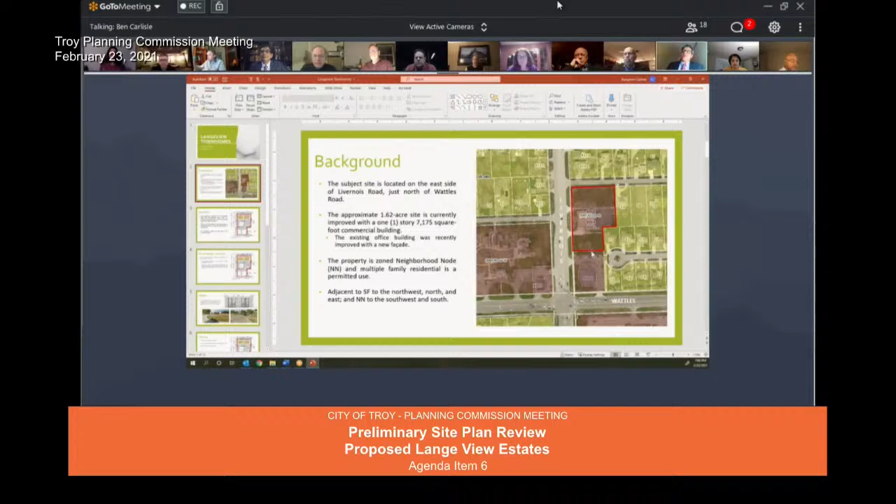Tonight before you is a proposed condominium or townhouse project. As the Chairman noted, the subject site is located on Livernois, just north of Wattles. The subject site is outlined here in the red outline. It includes 3 parcels and a total of approximately 1.6 acres. You'll note there is an existing 1-story, approximately 7,000 square foot office building on the site, which was recently improved with a new facade as part of it, through the building permit process. The property is a neighborhood node, and multifamily as proposed is a permitted use in this district. You'll note the site is surrounded by single family to the northwest, north, and east, and to the southwest and south is neighborhood node zoning at the intersection of Livernois and Wattles.

Proposed site plan is shown here in front of you. Again, just to outline, this is the existing office building currently on site that has been improved. The applicant is proposing to construct 8 townhomes that would front on Leetonia. Access to the site would be off 2 points of access off Livernois here. We should note that there is a 3rd parcel as part of the site, but it's not at this point proposed for any future development.

All access to the site will be off the 2 existing curb cuts that already exist on Livernois.

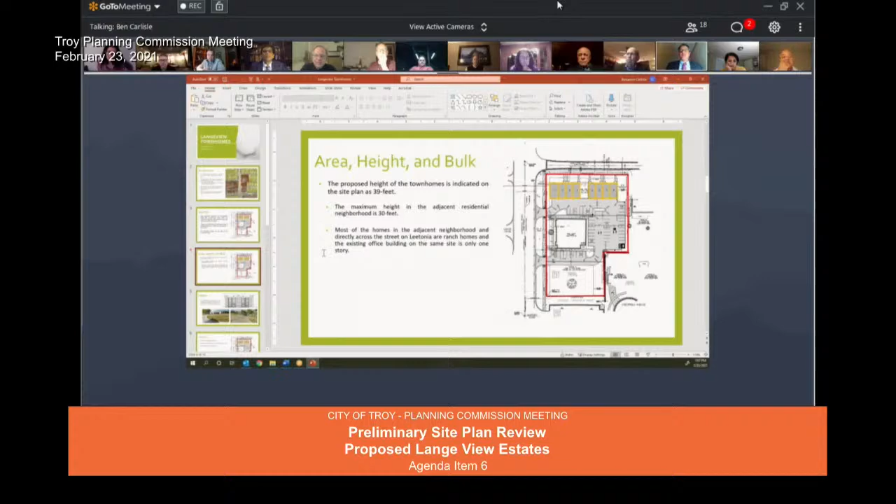With regards to area, height, and bulk, we note that by the dimensional standards, the application meets the zoning ordinance requirements. However, there is a provision in the zoning ordinance regarding transition.

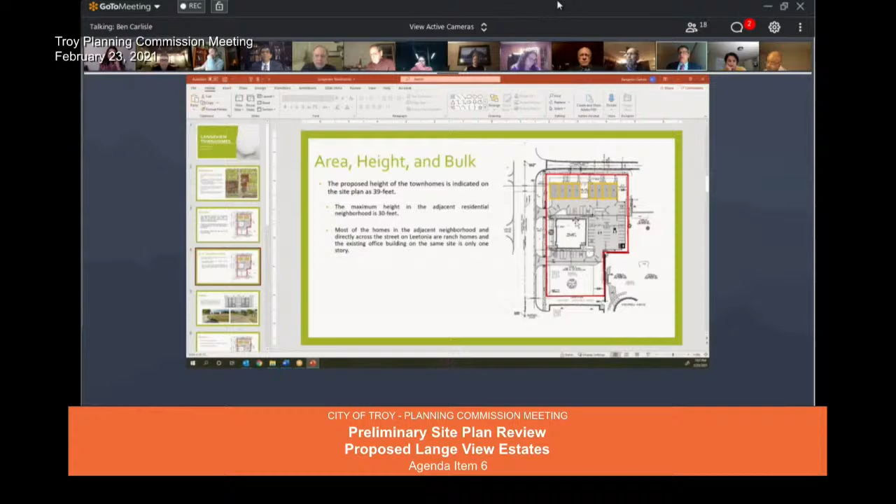One of those is in relationship to height. The proposed townhomes in the site plan are 39 feet, while the maximum height of the adjacent residential to both the north and east is only 30 feet. In fact, most of those homes in the adjacent neighborhood are single family, 1-story ranches. We also note that the existing building on site is a 1-story office building.

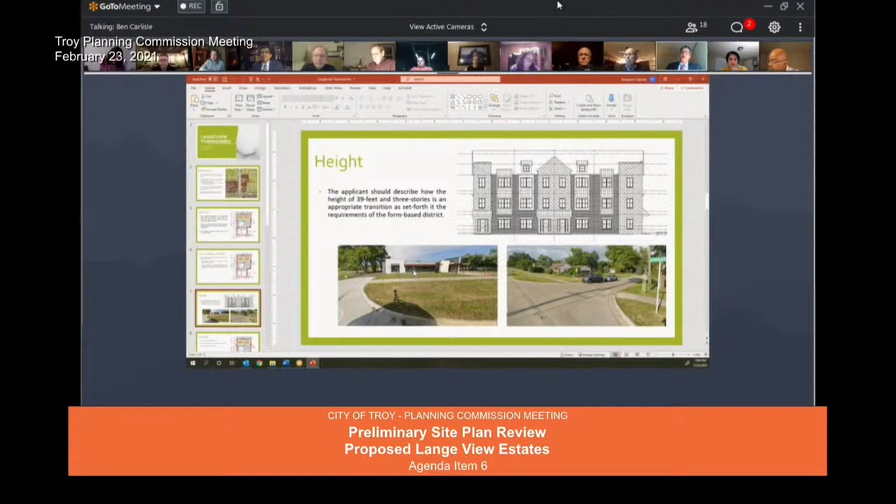So we are asking the Planning Commission to consider if a 39 feet high, 3-story building, 2 buildings essentially, on site really is an appropriate and comparable transition between the existing 1-story office building on site and the surrounding 1-story residential properties to the north and to the east.

With regards to parking, this was reviewed by both myself and the engineering department. We both know the office building itself is deficient in the number of handicap spaces, and many of the spaces on site serving the office building are short in terms of the required length of a parking space.

So they're going to have to expand or extend existing parking spaces. And lastly, the applicant needs to provide bicycle parking, because it's not provided on the site.

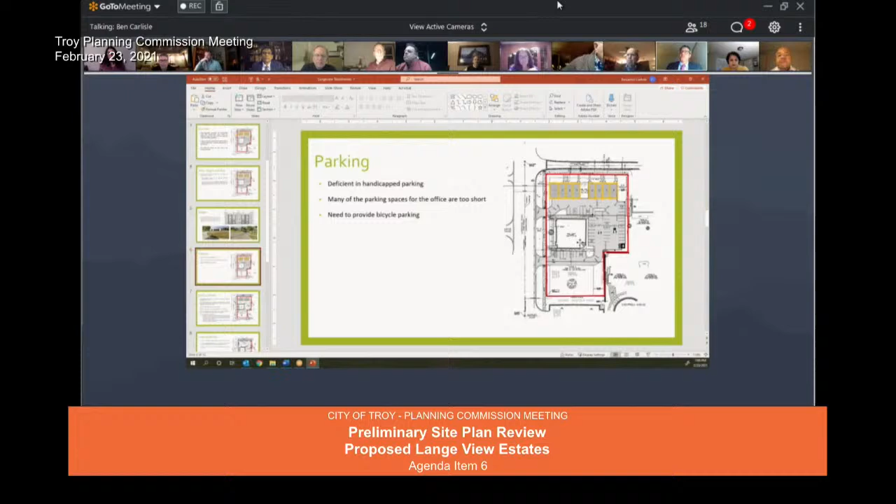The site was reviewed by the engineering and fire departments with regards to circulation. The fire department has expressed concern about fire apparatus moving around the rear parking lot, specifically in this corner location, and they don't feel they can meet the required turning radius. So they're asking the applicant to reconfigure the spaces or curbs in order to properly get a fire apparatus around the site.

With regards to the driveway, the engineering department noted that it needs to be 30 feet wide at the throat, and currently it's too narrow at that point. Also, the parking drive aisles must be 24 feet in width, and most of them are only 22 feet, so they're too narrow based on engineering standards.

The engineering department notes that though Livernois is a county road, they believe they will require a right turn deceleration taper somewhere in this general location as part of the site plan, and they're asking that the applicant consult with the road commission regarding that requirement.

The engineering department also reviewed the circulation and concludes that the rear parking area, specifically in this general area, is poorly configured and rather awkward. So in conjunction with the fire department, they're asking for some reconfiguration of the curbs to allow for better and smoother circulation in this particular area.

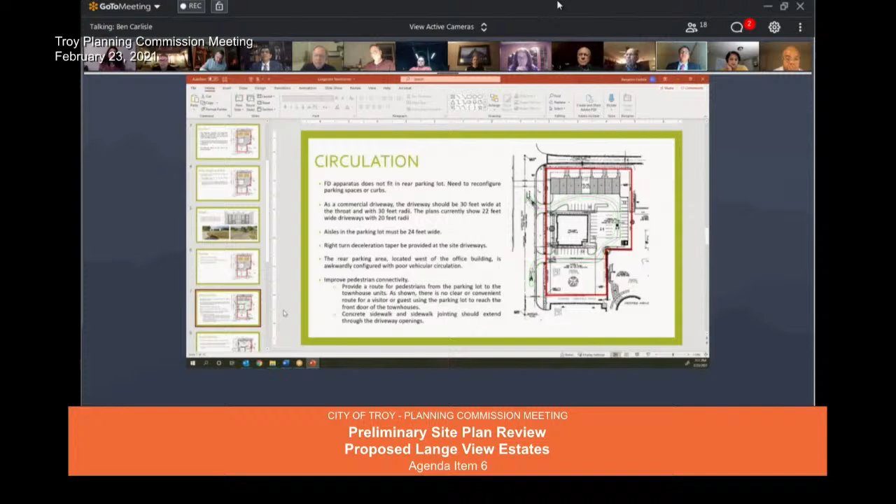This line of 13 parking spaces is required to be broken up with one landscape island with a tree inside of it. And lastly, the applicant indicated trash enclosures, but the details were not provided in the plan, so it's unclear how they propose to screen the trash enclosure.

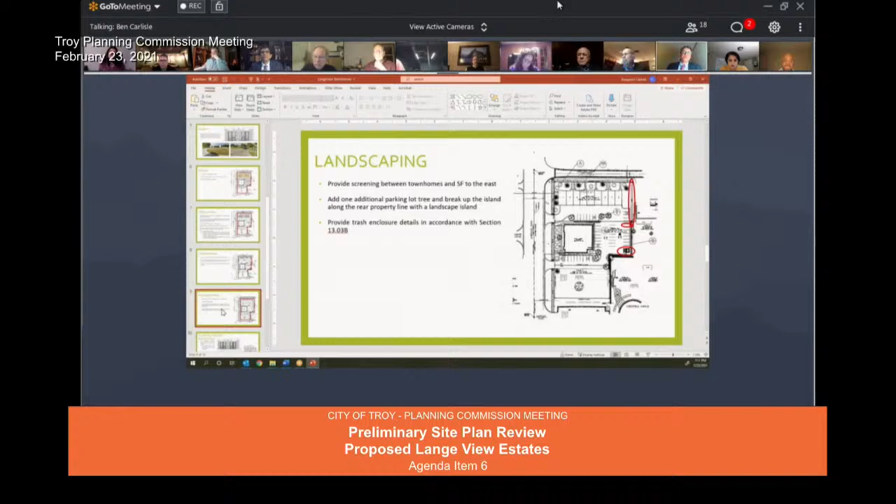The applicant did provide a photometric plan. A total of 4 pole-mounted fixtures are proposed. The applicant did not indicate any building lighting, and specifically we would like an indication of what the building lighting is on the front as it relates to Leetonia, with regards to how it may impact those properties on Leetonia. The applicant also did not provide cut sheets of the proposed fixtures.

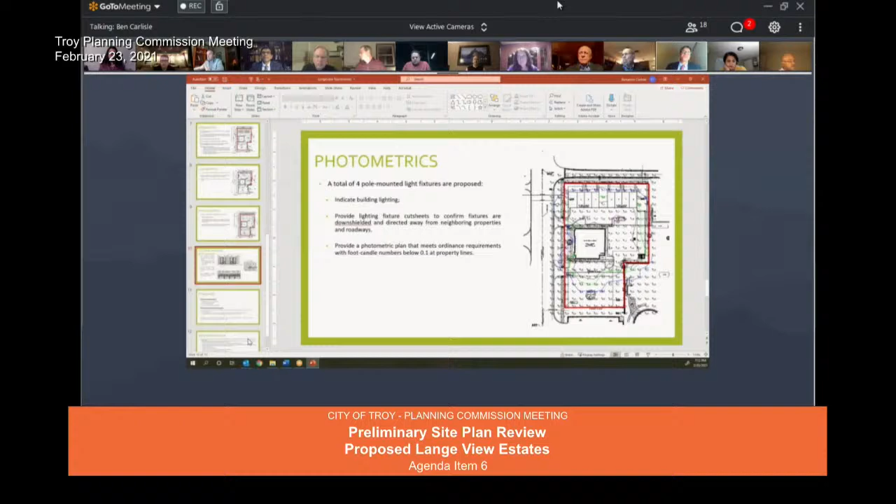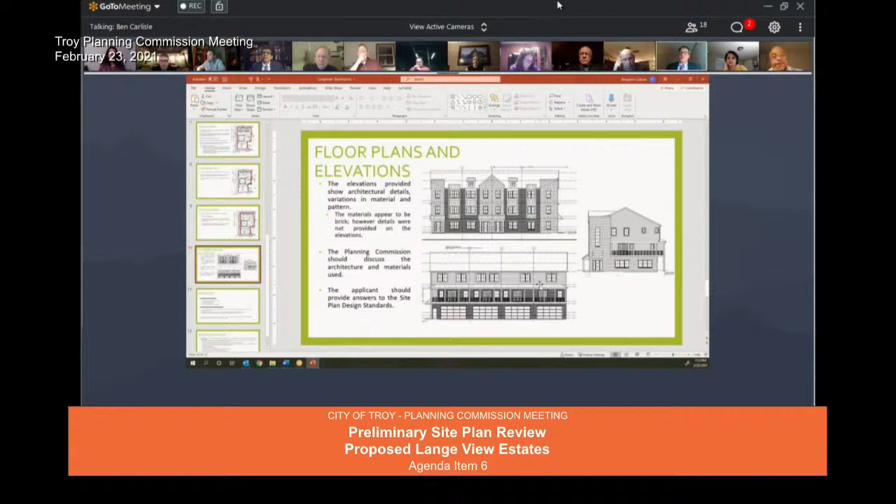The applicant is proposing what we think is a brick material, but the details of it were not provided on the elevation, so we're asking for clarification on that. In addition, we have asked the applicant to provide answers to the site plan design standards in the zoning ordinance that have not been answered to this point.

As noted, there are specific standards in the zoning ordinance with regards to both design standards and site plan review standards. At this point, we find it difficult to answer these questions until the applicant addresses the other site plan issues we previously noted in our review. So with that being said, we are recommending that the Planning Commission discuss the matter, but postpone any action to allow the applicant to resubmit plans.

And specifically all those numbers that I've listed, I'm not going to go through them, but there are numerous ones, and of most particular concern are those of the engineering and the fire department, because those affect life, health, and safety. So with that, Mr. Chairman, I'm open for any questions from the commission.